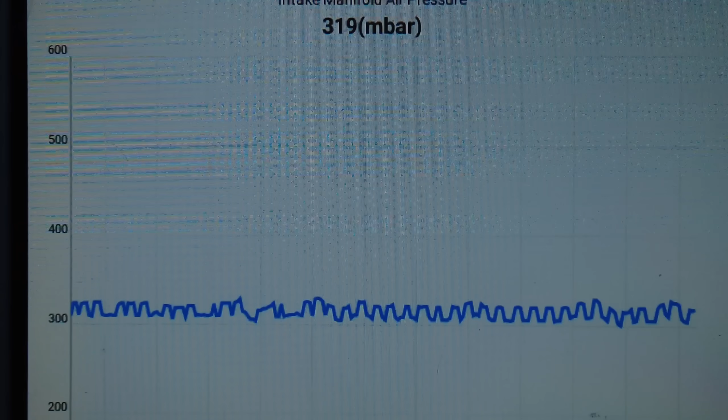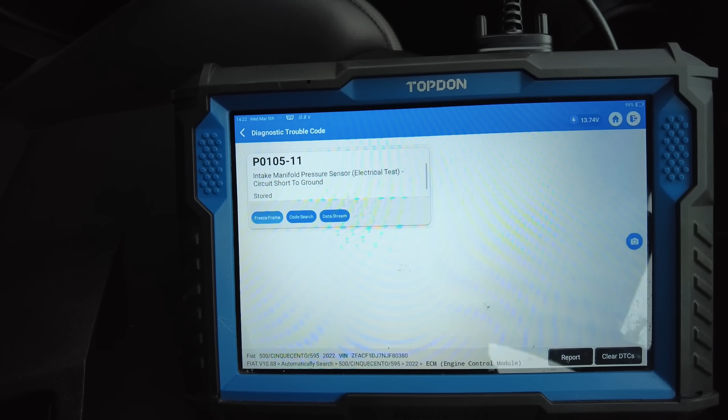If you look here, you can see that at the moment the engine management light is on. We're just monitoring the map sensor itself. Don't worry about that temperature value, I think that's just something wrong in the software side of the actual Topdon machine. But I will show you the fault code that we've got at the moment, so go to DTC. You can see there: intake manifold pressure sensor, electrical test, circuit short to ground.

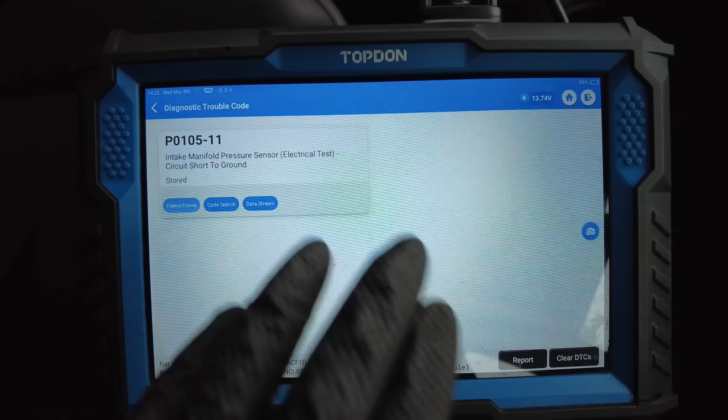Now what I'm going to do is clear that fault code, take it a run, and see if the fault will come back up, if I can get it to play up at any point. But yeah, let's just do that. I'll come back to you once, or if the fault comes back up. So what I'm going to do is just click clear DTCs.

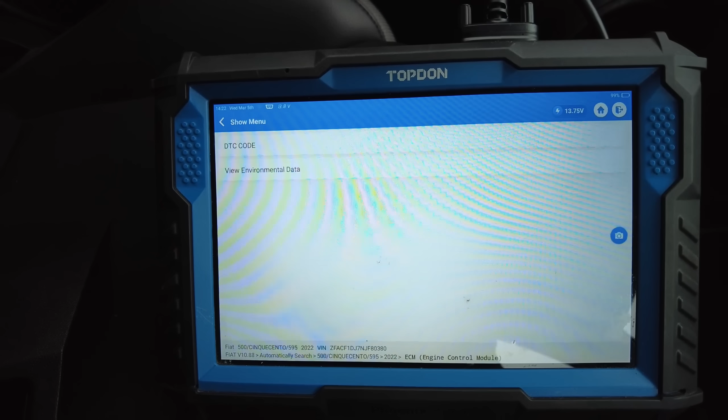So fault memory has been cleared. Okay, going to read fault code. We've got nothing at the minute. We've obviously still got our TPMS lights, I take it that's because it's sending errors along the network, so that's probably the reason for that. But we're not going to clear them at the moment, we're just going to take it a run and see if the map sensor will play up.

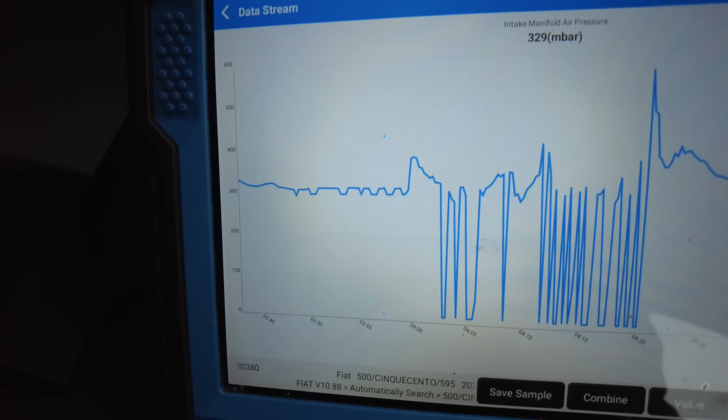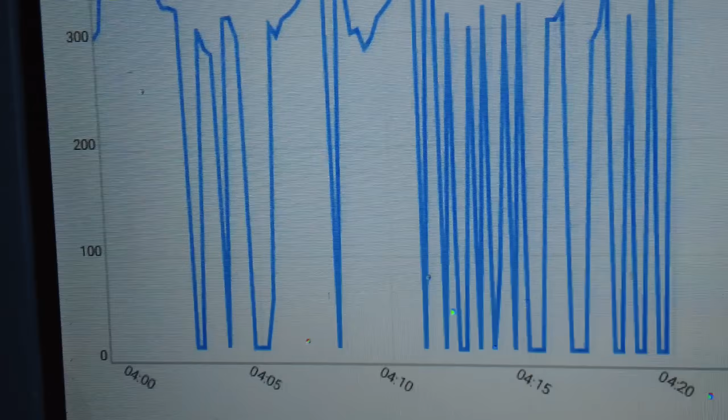So I've just gone a short distance and you can see that the map sensor has dropped massively down to nothing. Our engine management light is currently on, so we can confirm that there's definitely some form of electrical issue in this wiring loom.

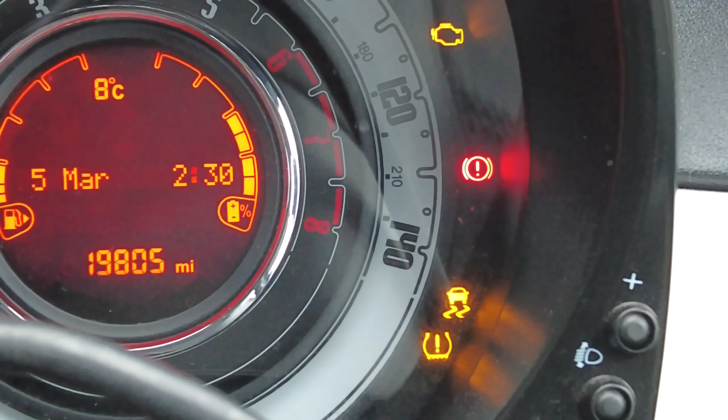Why Fiat wanted to replace the full loom, I don't know. Maybe this is a common issue. If it is a common issue and anybody that works on Fiats or at the dealership, let me know. This is the hybrid version, don't know what engine's in it, but it is a hybrid. Are the engine harnesses on these bad for going, or is it just this car that's maybe had this fault? I'm not too sure, but sometimes the dealership have got their hands tied, they're not allowed to actually look through wiring looms and just end up, it's in their best interest to just put a new one on it.

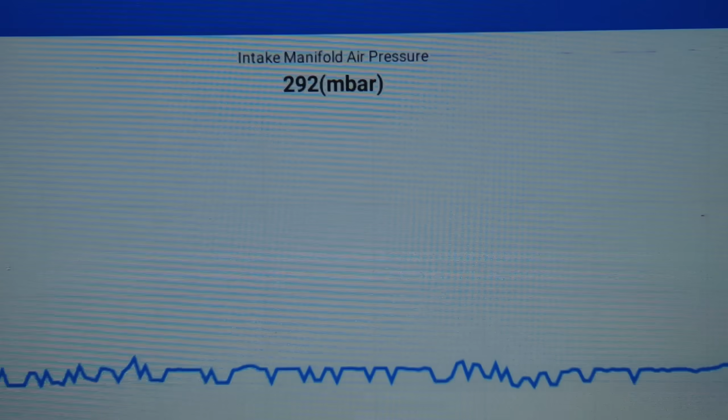But in this case they couldn't get a new one, so that's why I am here, I should say. But I've got an EML on now. We can confirm it's actually back to normal, it's reading 292 millibars. Don't know how accurate that is on this machine.

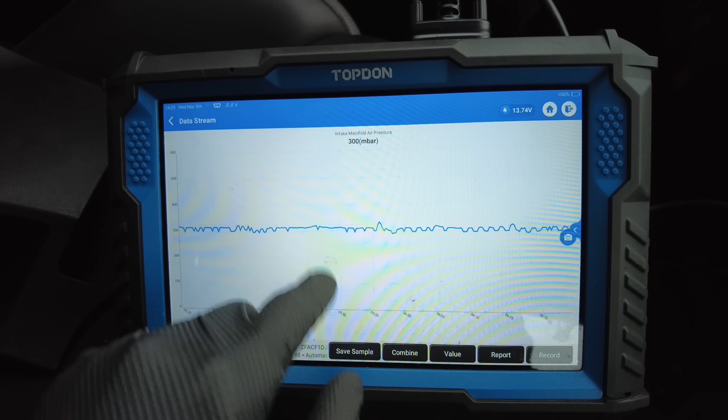What we're going to do is take it back, and I think I am going to do a wiggle test of the wiring loom while watching live data, and we'll see if anywhere in that loom, if we wiggle it, this graphing mode drops out. If not, then is it the wiring loom or is it a fault internal to the actual engine ECU?

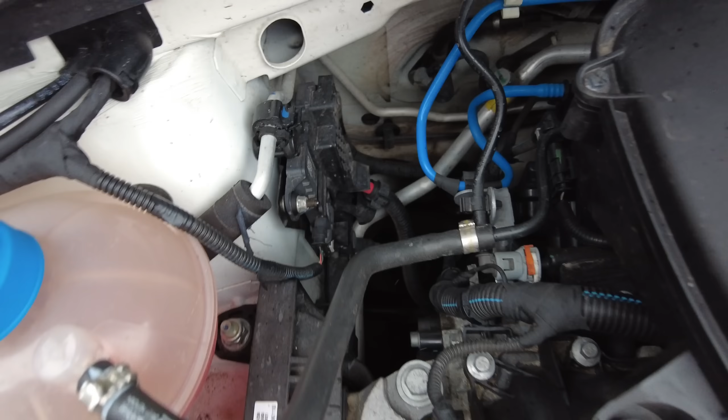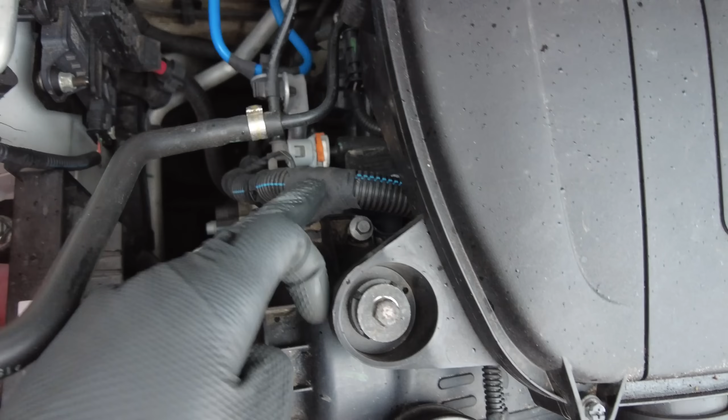You need to excuse the wind noise, but it's very wet and windy today, so I'm just going to show you the layout of this engine. So right down here on the inlet manifold, you can see we've got the map sensor. That runs along this loom, runs underneath this intake box, runs up here into your engine ECU. So it isn't a terrible loom to visually inspect, it's just obviously tight in places, but you can see our map sensor sits down there in a nice wee spot.

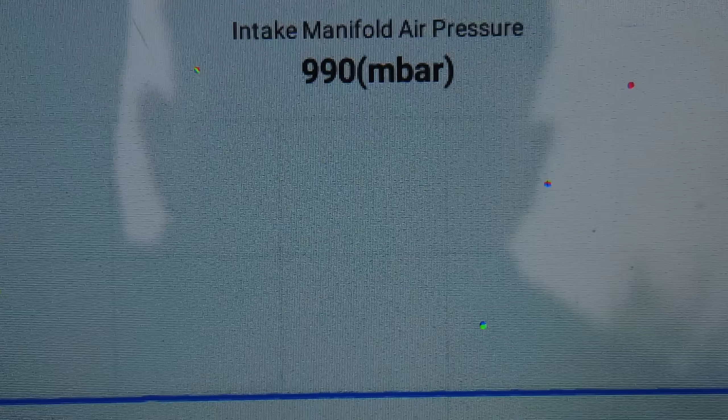So right now we've just got the ignition on. Come on, focus, focus. Right, I think we're focused now. No, we are not. Right, there we go, so we're at round about atmospheric pressure now.

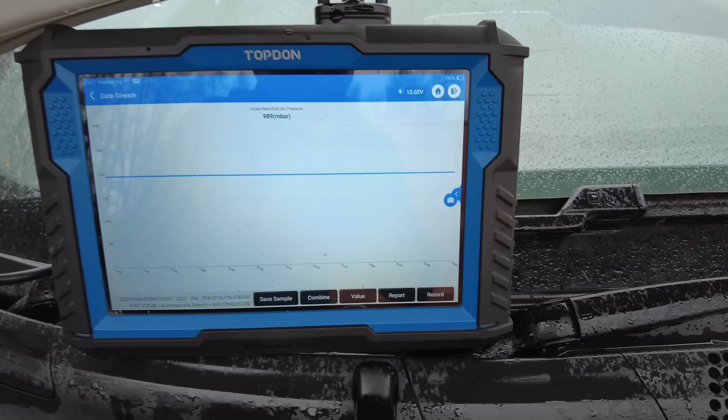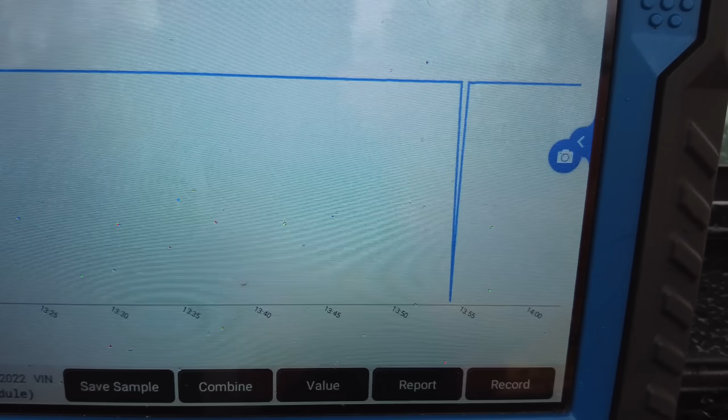So what I'm going to do is go around the loom. Now I don't know how you're actually going to see this, but I'm just going to give the loom a wiggle, see if we can see any changes. Oh, look at that, you see that drop out there? That dropped out straight away just by wiggling that loom.

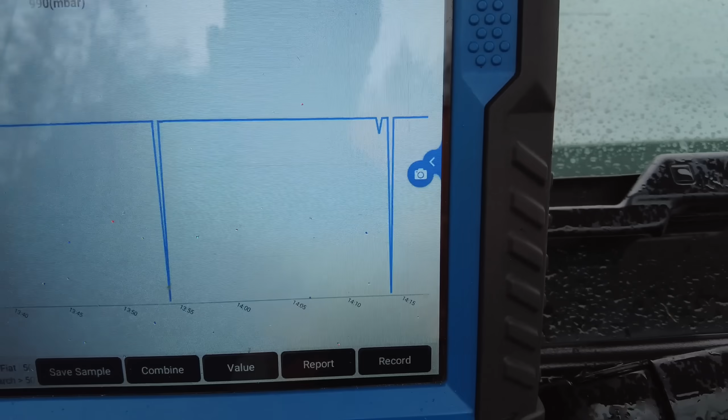So that area, let me try it again. So I'm giving it a little wiggle now. There we go, there's another dropout. Fantastic. So our area of concern, I believe, is going to be in this area here, unless I'm pulling up and it's tugging something further along.

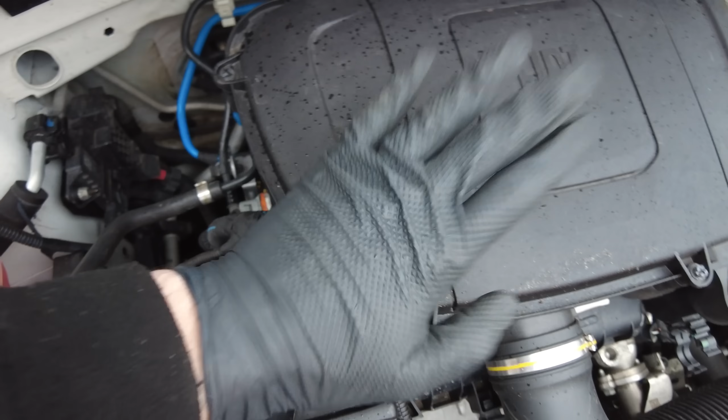So what I'm going to do in this case is take off the air filter box and see if I can disconnect as many of these sensors as I can, so I can lift up the loom and have a visual inspection on it. Right, so this is a little bit crazy. I thought I'd located where the potential short was, or the issue with the actual wiring, but I've opened it up and there's nothing really obvious or visible that I can see, but I'll show you what I thought might have been causing the issue.

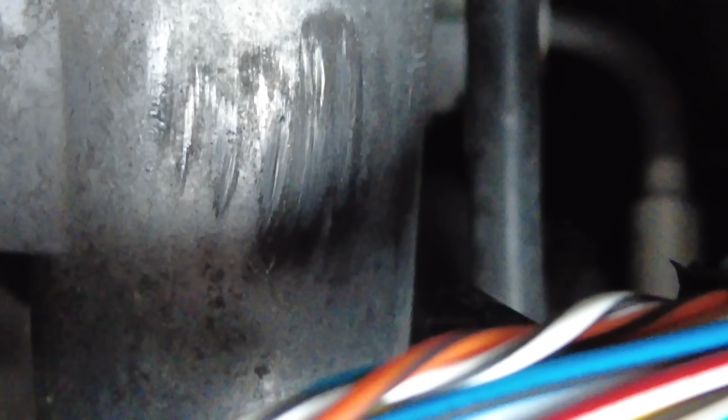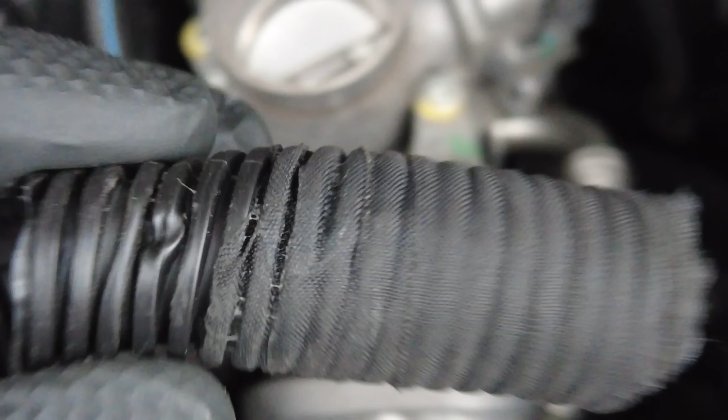So if you look down there, you can see that shiny part on the throttle body housing. I thought originally that the loom might have been rubbing, and you can see it was slightly rubbing through, but nothing that would have caused a direct short to ground. But that's when I stumbled upon this.

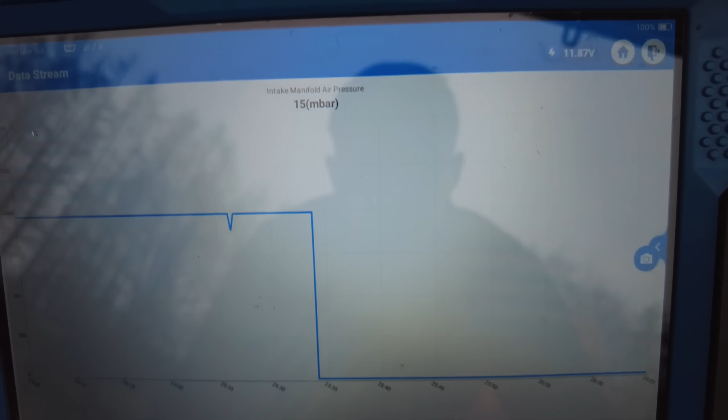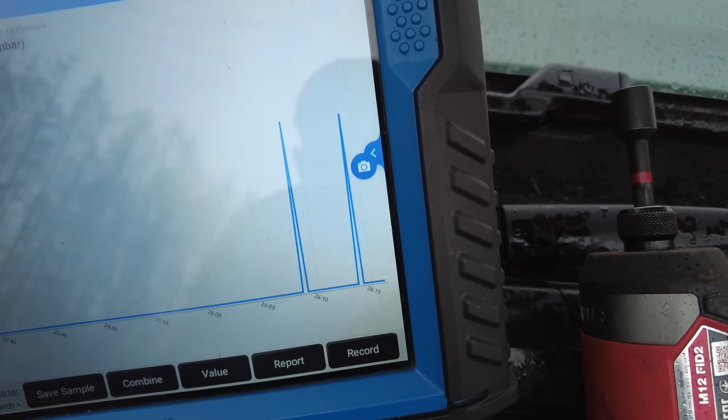I've got the ignition on right now, and at the moment we should be near atmospheric pressure. So if I give that loom a little tap, all I'm doing is lifting it up, up and down, give it another little pull, and you can see it's all over the place.

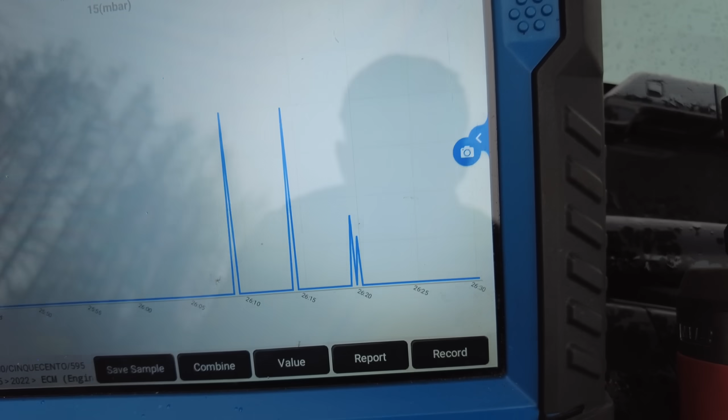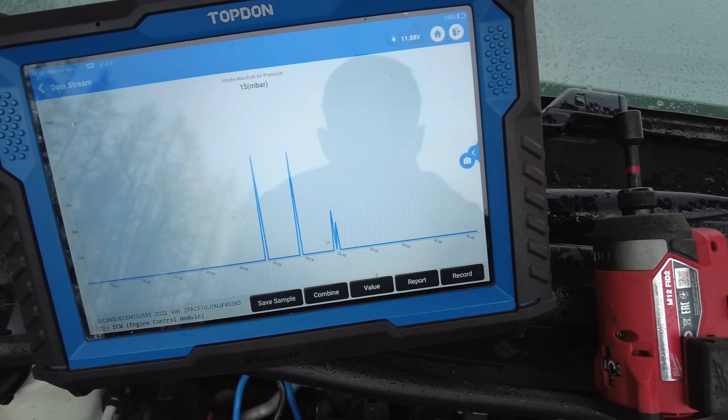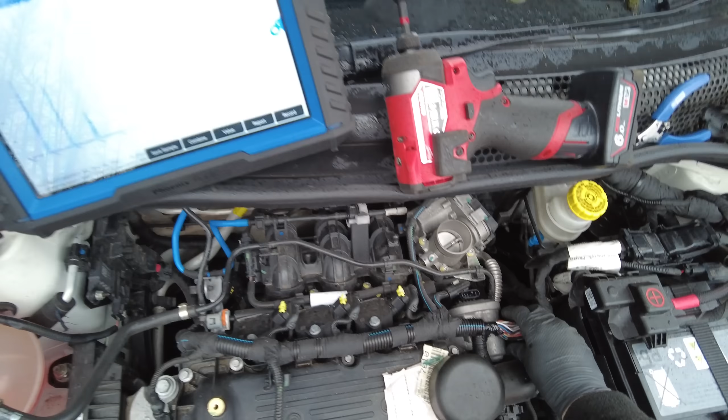I'm just trying to locate it, possibly it's got to be somewhere in this short bit of harness that goes direct to the ECU, because it doesn't come out this end, I don't believe. I'll give that a wiggle. Oh, you can see it jump up there. Look at that, it's back up to atmospheric pressure. If I move that again, just keep an eye on the live data, it drops.

So what I'm going to do is switch ignition off, disconnect the engine ECU harness. I'm going to unravel all this tape and see if I can locate or visually see the exact point of failure.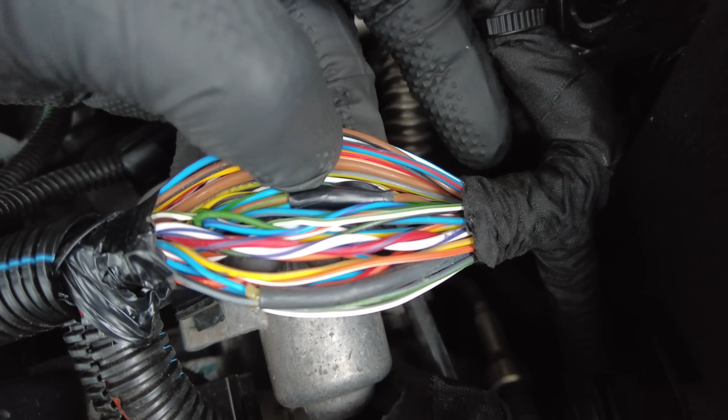Unless, is that meant to be like that? So there is a bit of tape in there, I don't know if that's meant to be like that. Can you see that in there? I would imagine it would be, because it's all original tape that's been on it, it's not as if someone's been in there before. But what I'm going to do is do a visual myself, and I'll come back to you with, hopefully, the results.

Sometimes I really surprise myself. So I've located where the break is, and I'll just spin these around to show you. This orange wire right here, you can see it's orange with a white tracer.

Gave that a wee pull. In fact, is it that one? It's a white with orange tracer. So I gave that a pull. Doink. Look at that, so the break is in this twist here. From factory they must just be too tight in there, and it's pulling on the wires.

So I'm going to unravel all of this tape, starting round about here, repair it, then tape it back up with the same tape. And as Bob would say from RMS Diagnostics, job's a carrot.

So I thought I would show you this as well, because this is absolutely shocking. This is what you're paying for. I don't know how much one of these is new, especially a hybrid, maybe 18 grand or something, maybe a bit less, maybe a bit more, I'm not sure. But look at the way the wiring's been taped up from factory.

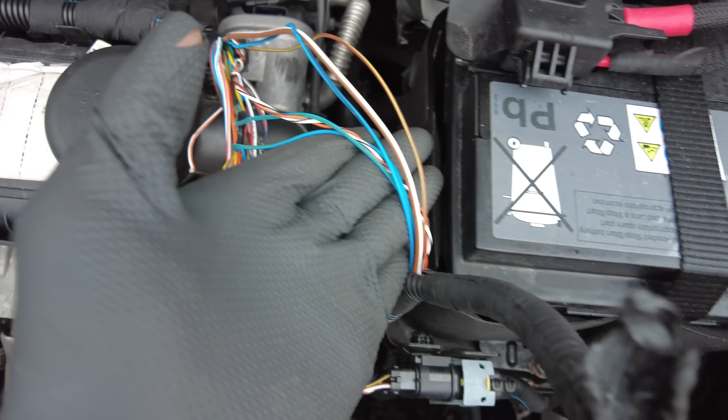So I've stripped this portion of the loom apart, and no wonder this has been under stress. Look at the way this actually runs, it's pulled into there, into this loom, rather than just taping it up into the one loom. This right here is constantly under stress because it's tied into the opposite loom here.

So I'll show you the repair that I've done. I've just cut out the old join, the old heat shrink. I think it's a heat shrink, it looks like some sort of cool seal or something like that, I'm not too sure.

Sorry, I just got diverted there, I thought someone was coming over to talk to us.

So I've done the repair. I don't usually show the repairs because there's always somebody out there that basically knows better. But this is the way I've done it, and it's the right way to do it in my eyes anyway, so I'll show you.

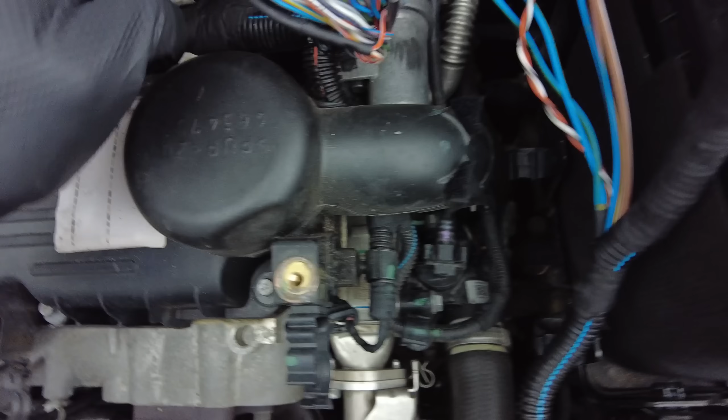So what I've done is I've extended the cable, made the main join there, so the two wires are twisting into there. My cable, I've left a bit of length on it, runs up and around there. Then the other join is just in that heat shrink tubing. Now the heat shrink tubing I use is the stuff with the glue in it, so it creates a good seal. I'm going to be using the proper loom tape to tape all this up, and it will look as if nobody's been in there.

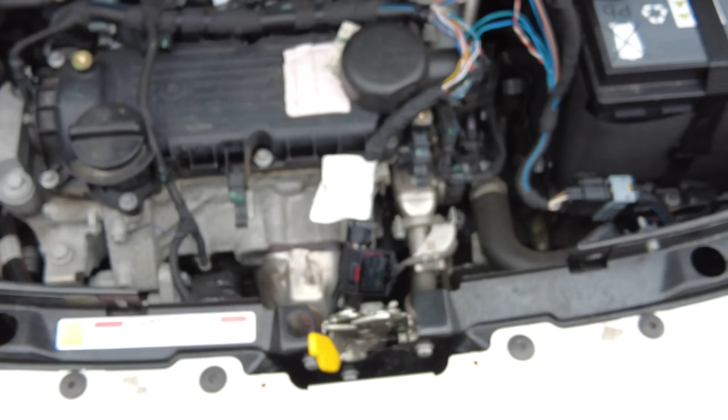So we've got everything all built up apart from the air filter box. It's all loom taped, so let me know in the comments what you think of that repair. Does it look alright? Does it look absolutely rubbish? I would say that looks not too bad, to be honest.

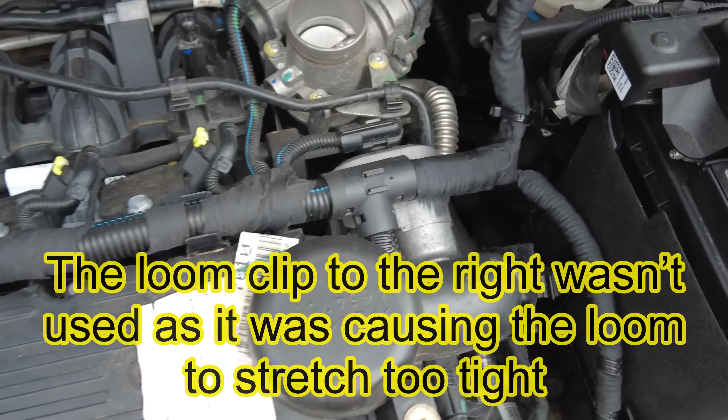Down here, you can see, or maybe you can't because it's clear, I've put a bit of Dodo mat. It's like a sound deadening material, clear stuff. I've just put that under there so it can't rub on there at all. So that's all nicely freshly taped up as well.

Got the keys here, so what I'm going to do is just start the car up. So it starts right up. Obviously we've got a ton of warning lights on the dash, so I'll just move these over here. Hopefully you can see that.

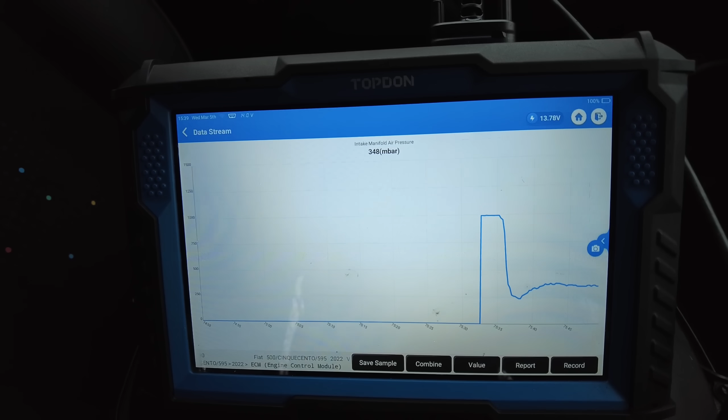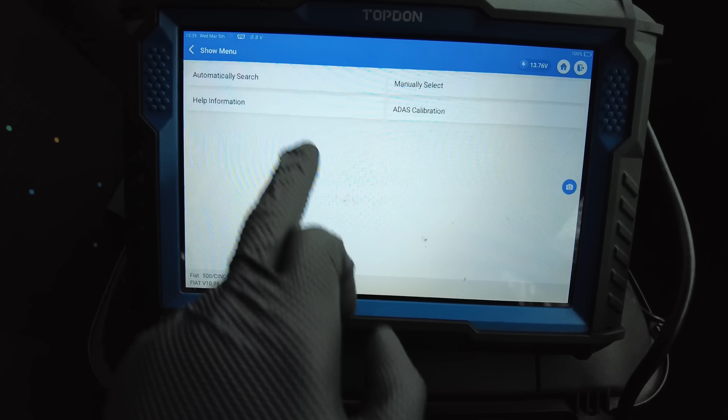So our map sensor's reading back to the way it should. Going to read fault codes. In fact, what we'll do is go out of there, refresh it, do a high speed scan, then clear all the fault codes, and leave it running for a bit. But I think we'll take it for a run, may as well. It's a bit daft not to.

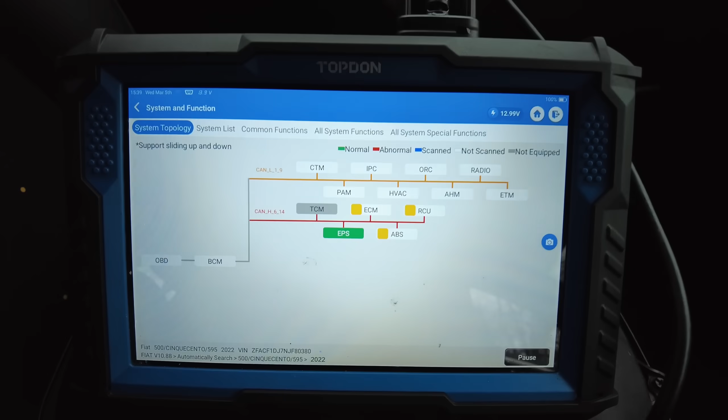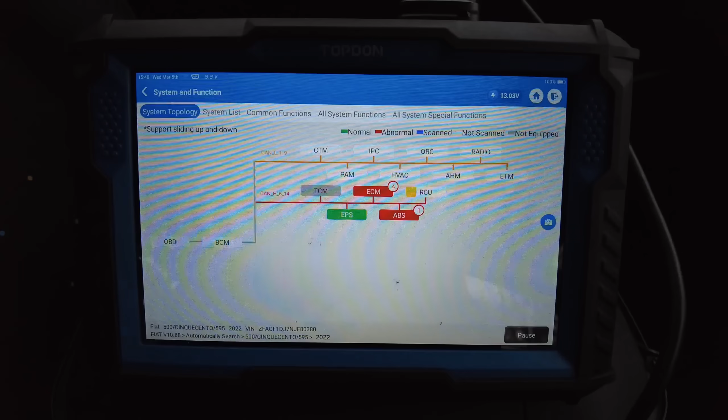So you can see we've got a bunch of stuff now. I don't know if the ABS fault's going to be in correlation because it's got an engine warning on. Probably is, but we'll find out. So it's done the health scan pretty quickly there. It's gone to ABS. Yeah, so there we go.

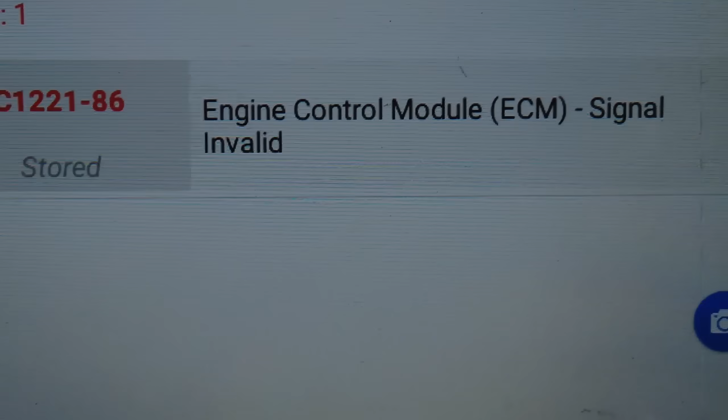We have got a C122186 engine control module signal invalid, and our BCM is also reporting a BCAN fault, which I'm not interested in. So low pressure EGR valve, what's happening here? Low pressure EGR valve H bridge. Okay, don't like that.

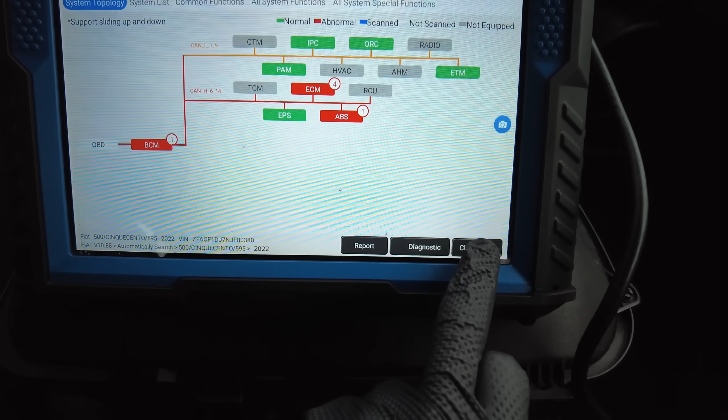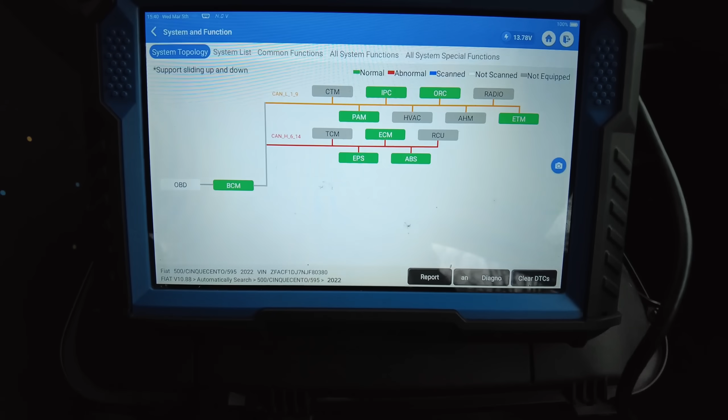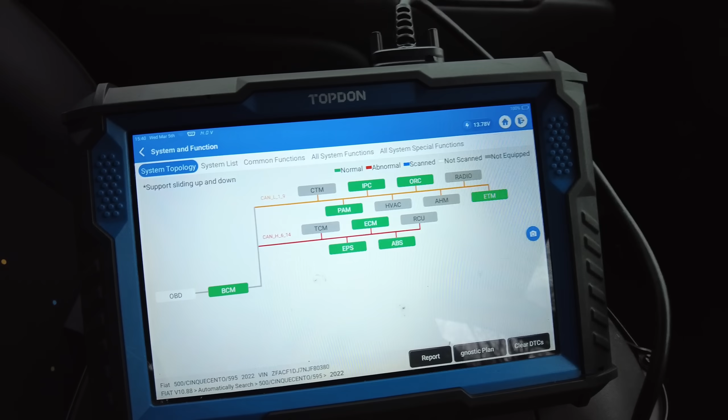That might have just been because I had the ECU disconnected, I hope. So we've managed to get rid of most of the warning lights. TPMS light, I don't know if you can reset that on this. I'll check that out, or it might need a run to reset, but yeah, we'll leave it running for a bit, see if the fault codes come back. If not, job's a good one, and we'll call that a day.

Right, so I've basically taken the Fiat for a run. I've let it idle for quite a while as well, and it is spot on. So that's all it was, just that wire with the tightness in it, a sort of three-way split, one wire going in, and two or three wires going out - I can't remember how many wires it was now, but I'll just show you here.

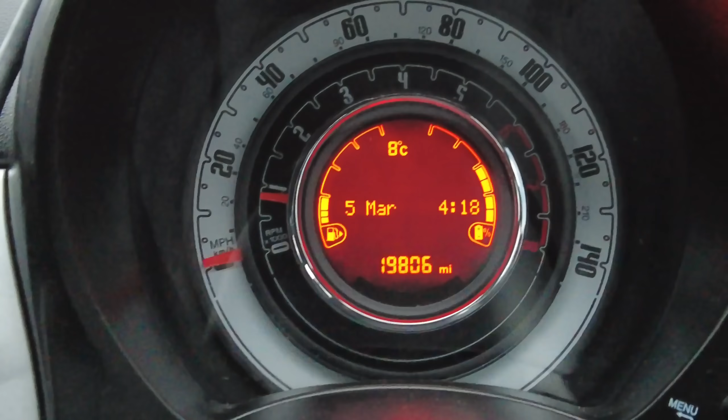So let me know in the comments what you guys think. Was this just down to the dealership not testing properly? Was it down to the dealership knowing that this was going to be the issue? Even though they say it needs a wiring loom, it only needed a wiring loom after they knew that the sensor had been fitted. So do dealerships get time to strip down the wiring loom, or do they just get told it needs a wiring loom? But then if the dealership couldn't get one, why did they make no effort to actually find where the break was?

So let me know what you guys think of that, your opinions on that. Is it just down to lack of dealership training on how to find electrical faults, or is it just because they more or less can't be bothered and they just want to fit a new loom onto it, which is going to cost - I don't know how much a loom would cost for one of these, probably over $1,000 anyway - but that doesn't bear the fact that you can't get one. So let me know what you guys think in the comments.